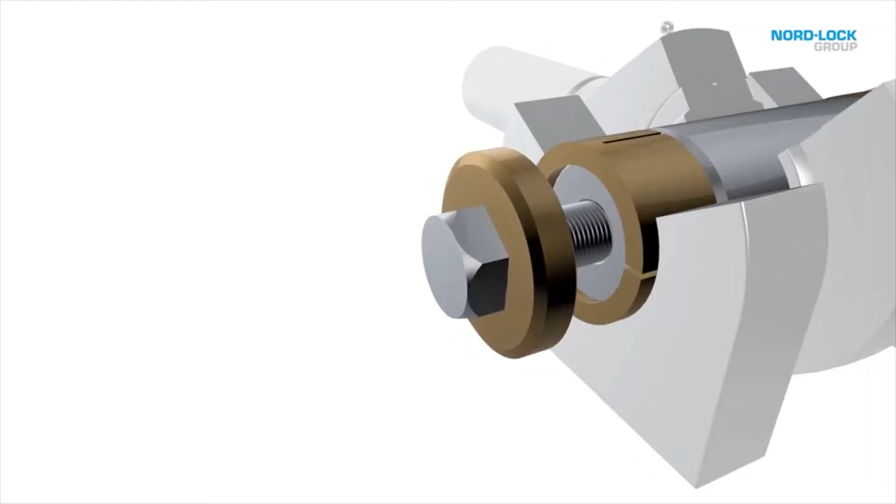We are a team of students in the Industrial and Manufacturing Systems Engineering Department at Iowa State University. For our senior design project, we had the opportunity to partner with Expander on a facility expansion and layout design project. Here in DeWitt, Iowa, Expander manufactures the Expander system. The Expander system is a pivot pin that eliminates wear in rotational joints by expanding to create a secure fit for any hole. The Expander system is comprised of a pin, sleeves, washers, and bolts.

In the next 5 years, Expander projects an increase in sales from $7 million to $20 million. To meet this projected increase in sales, we worked with Expander to develop a 5-year facility expansion. We have 3 main objectives for our facility expansion. Number 1, provide a future state layout that meets $20 million in sales by 2027. Number 2, reduce the average distance traveled for parts per projected sales by 25%. Number 3, not to exceed the expansion budget of just under $7 million.

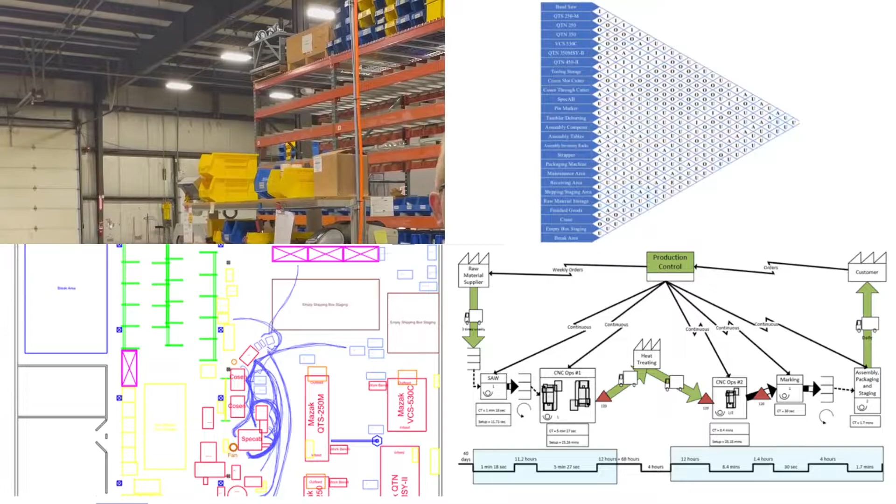The Expander facility currently resides on only 8% of their property, which means there's lots of room for expansion. To better understand the facility, we created spaghetti diagrams, value stream maps, relationship diagrams, and performed work sampling studies. We identified several lean improvement opportunities, especially with raw material delivery, outsourced work, and material flow.

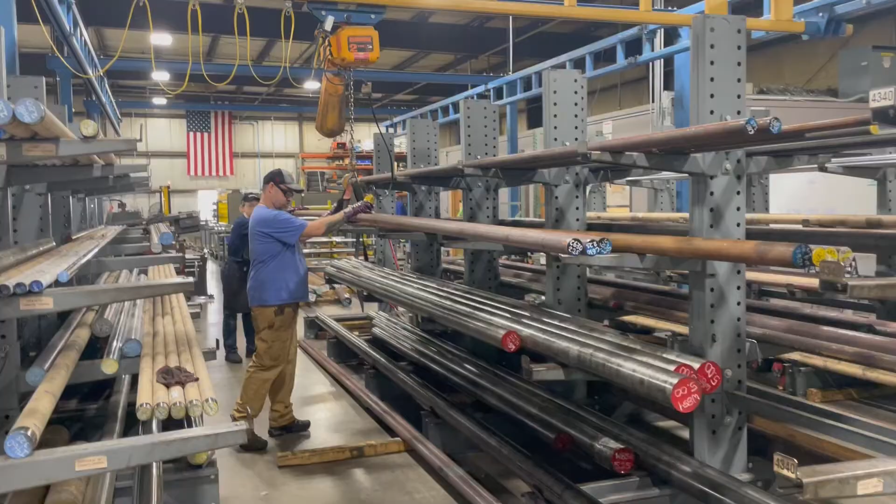Currently, Expander spends a large amount of time unloading raw material through these doors outside, bringing them in with a fork truck, and then storing them in this large bar raw material racking system. Once stored, the bars are difficult to remove from the racking, and it takes the saw operator a great amount of time to retrieve a bar for processing. Expander uses local partners to perform plating and heat treating operations for a large majority of their components. When these components leave and re-enter the facility, they travel almost double the distance of non-outsourced components.

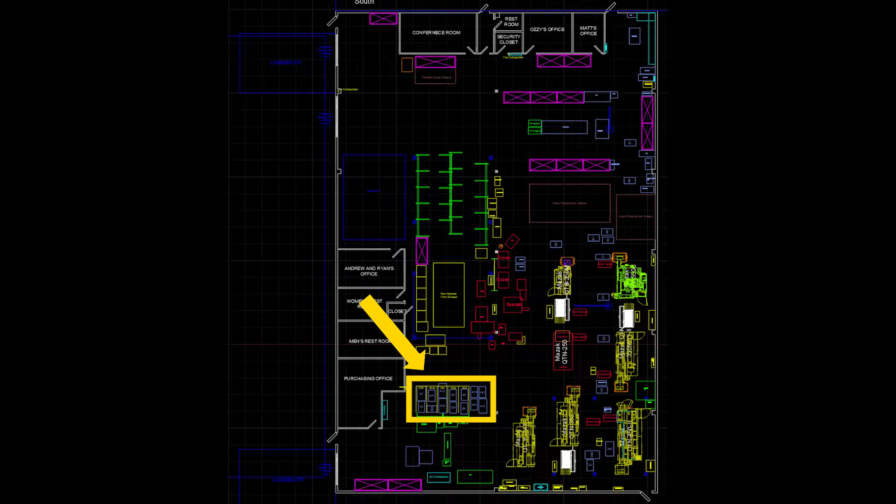Expander utilizes these small carts to transport material throughout the facility. Once the material is done at the saw area, it comes to this raw material staging area. CNC operators come over here to grab a cart full of raw material and then bring it back to their CNC machine. Throughout the rest of the process, there is no staging area for these carts, which can lead to excess travel and potentially cluttered walkways for the workers.

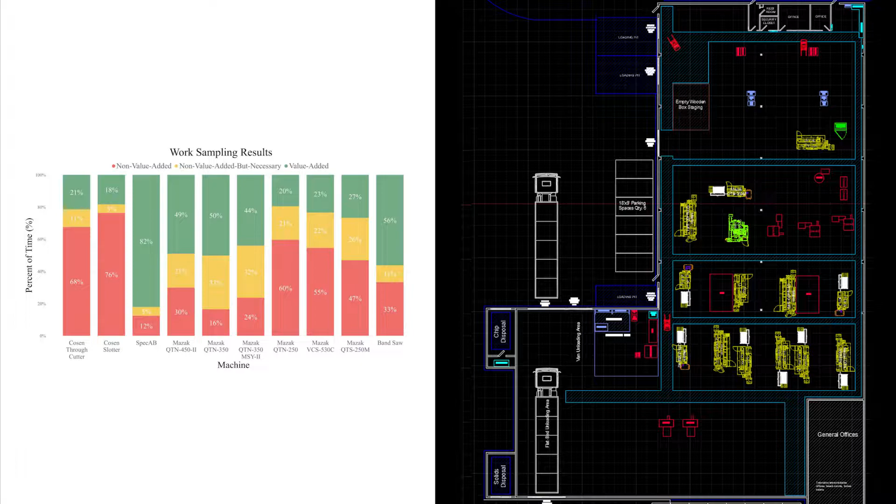Based on our conversations with Expander and the improvement opportunities identified during our current state analysis, we developed a future state layout design. We utilized capacity data from our work sampling studies to determine how many operators to hire and which machines to purchase to support the anticipated $20 million in sales.

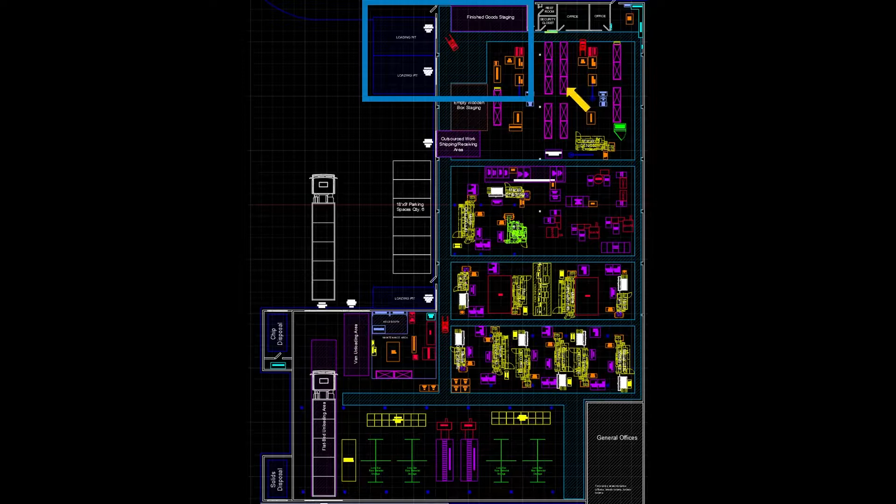In the new facility, trucks drive in under a remote-controlled gantry crane. Raw material can be quickly unloaded into new shelf-based racking for easy access. As material flows linearly upward, it is delivered directly to marked staging areas at each step in the process. To reduce machine setup and material handling, the subcomponents of the Expander system are split up into dedicated lanes. After the primary machining operations, parts can exit and return through an intermediate outsourcing shipping dock, which drastically reduces material travel. Finally, parts are assembled and shipped out the south side of the facility.

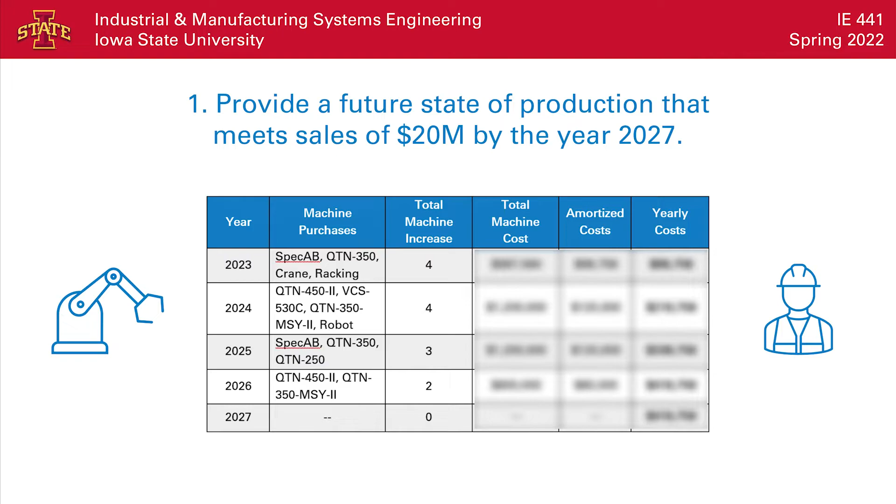This future state design achieved each of our project objectives. First, we recommended hiring and machine investments to support $20 million in sales in the future state based on capacity data from our work sampling studies. Second, we reduced the average distance traveled for parts per projected sales by 48%, surpassing our goal of 25%.

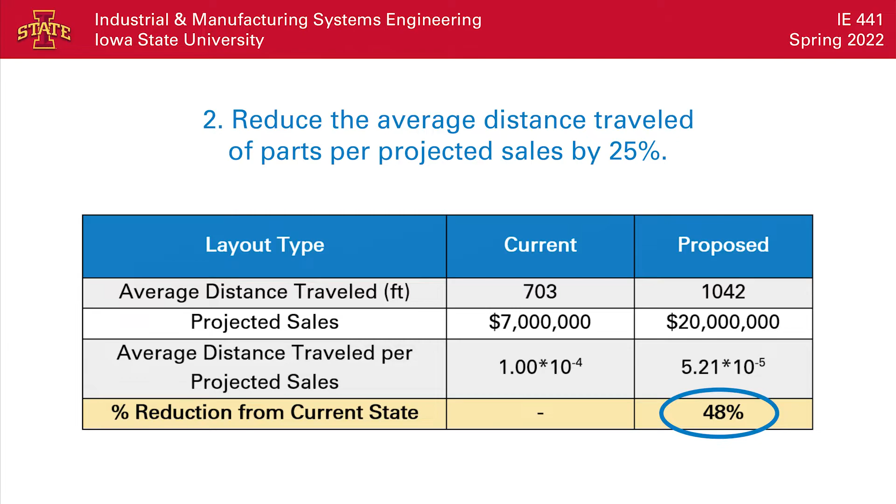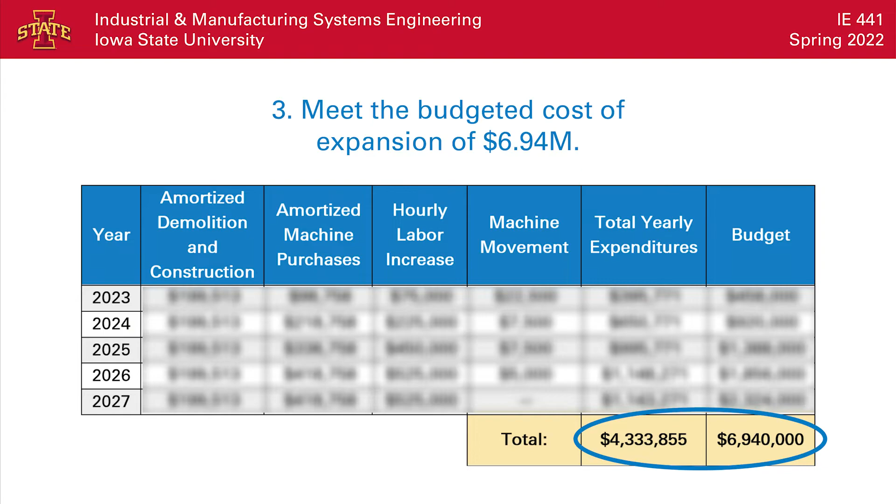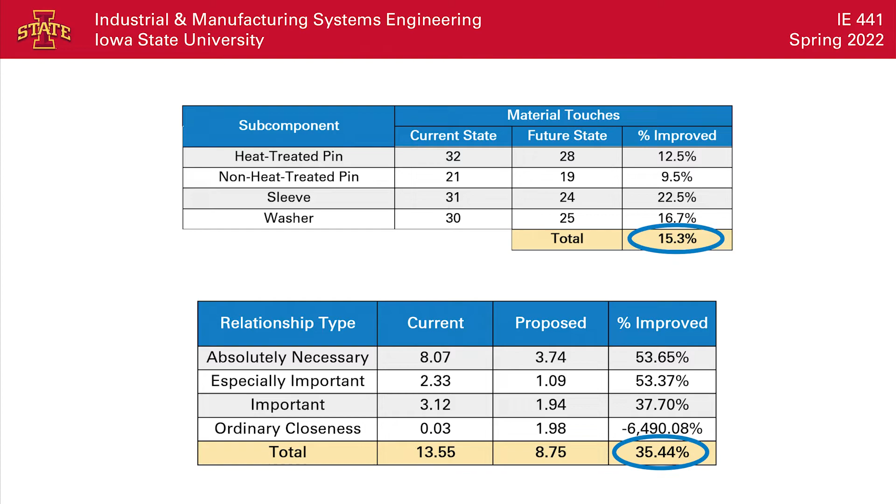And lastly, we gathered cost estimates and determined yearly expenditures totaling $4.3 million, which is 38% less than our budgeted $6.9 million. In addition to our original objectives, we reduced material touches by an average of 15% and improved our relationship diagram flow planner score by 35%. Finally, our project had a final 3-year net present value of just over $11 million with a return on investment of 65%.